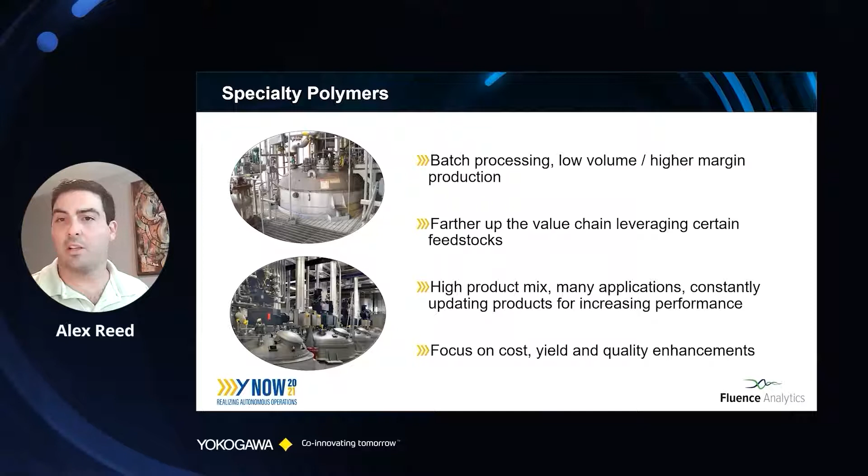On the specialty polymer side, we see batch processing, typically low volume, higher margin. This is farther up the value chain, leveraging a number of different feedstocks that come from that petrochemical world, and some are bio-based now too. What we see is a high product mix - a typical plant might have 30, 40, 50, 100, 200 SKUs targeted at specific applications, and they're constantly updating products, trying to find that edge and meet new customer requirements. So there's a very fast-paced, innovative process around launching new products in this industry. Just like commodity, they're also focused on cost, yield, and quality improvements.

To summarize, this is the trend everyone is following in the world - continuous optimization just to stay competitive, just to keep up. If you want to differentiate, you really have to drill into one or more of these areas. Some companies are particularly focused on cost improvement - they want to gain market share, increase margins, and be more competitive in pricing. Others are focused on launching the next great product, improving quality, tightening specifications to differentiate from competition. And everyone wants to get more out of their assets, improving yields without having to invest a whole lot in new assets.

Now we're seeing a very big push - this is an existential issue affecting all of us, with the ESG angle. The more you can do with less, the better. Even finding ways to enable that circular economy, going from end material back to feedstock and maybe back through to an end material using existing assets - there are some very interesting trends in that space. But the other areas are standard ones that everyone's always trying to push and drive to optimize.

Some of the things we're seeing in the process industry are just reflective of the environment - we have so much rapid change. Companies are focusing on operational and profit optimization - how do you build a specific case to improve the economics in each of your plants or whatever you're trying to do. On the supply chain side, this one's particularly acute now. We're seeing this all over the world - higher visibility, optimizing the paths through your supply chain, is absolutely critical.

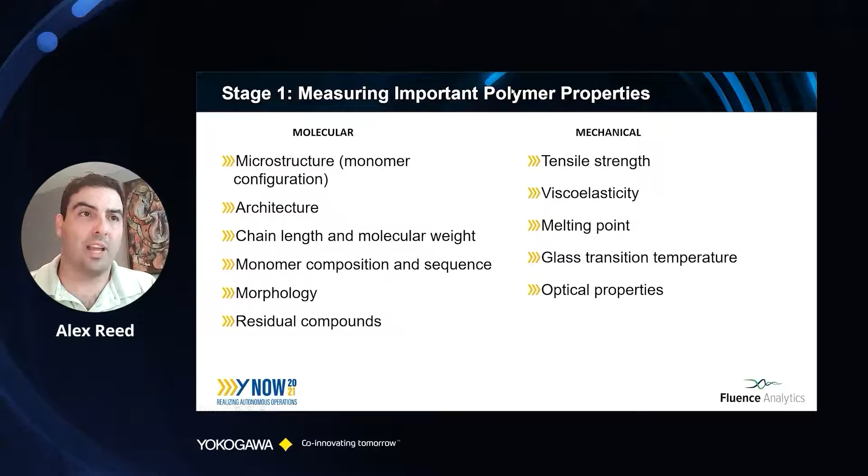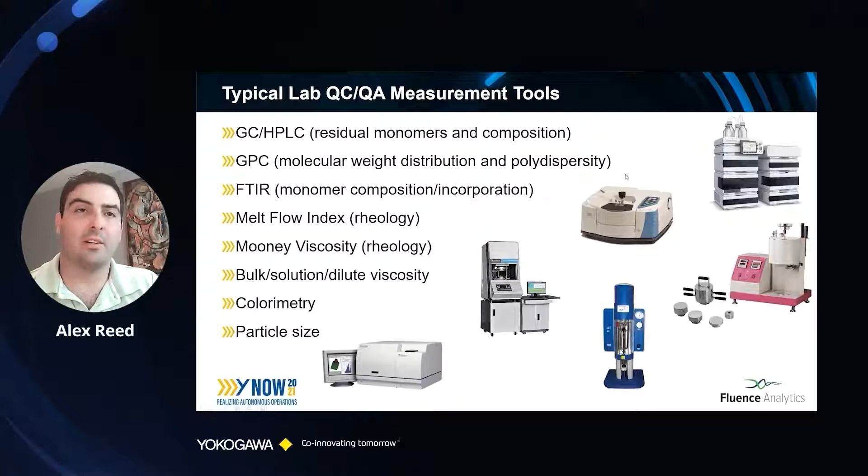And then you see on the way that's done now in the lab, there's a number of different methods. You've got GC, HPLC for that monomer approach, GPC for your molecular weight, FTIR. So there's a whole suite of tools currently being used in labs to tackle a number of those different measurements that I highlighted earlier, and fundamentally, a key issue here is there's a natural bottleneck in relying on an offline single point lab measurement.

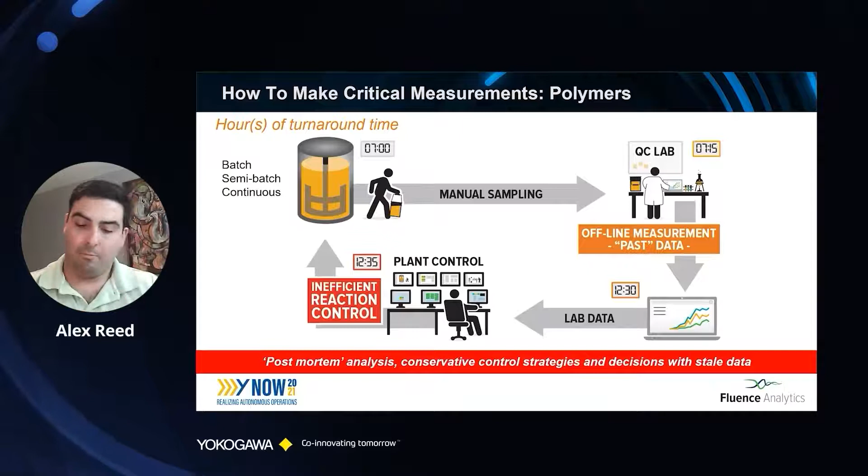And if you're trying to drive further and further autonomy, if you want to get tighter control, obviously sometimes you might have 1 to 2 to 3, 4 hours of lag time and you have one data point. It's going to be very hard to control a process simply based on that. And so that's one of the key issues that we've seen.

And so what our company has done is we've actually developed a technology. We're a spin out from Tulane University, and we were working on this for a number of years, working with chemical companies looking to optimize their production process. And we developed this patented ACOMP system, automatic continuous online monitoring of polymer reactions. And really what we're doing is it's a multi-detector, multi-parameter measurement to measure molecular properties in real time.

And so we have a fully integrated hardware system, everything from the sampling to the automation inside the box to the actual analysis software you see here that's interpreting all that data to provide that real-time output. And then what that really allows us to do is, with today a human in the loop, it goes into a control room, and having that real-time data and that human in the loop, we're able to start to take advantage of this measured deviation detection to intervene and start to optimize and control at that first stage.

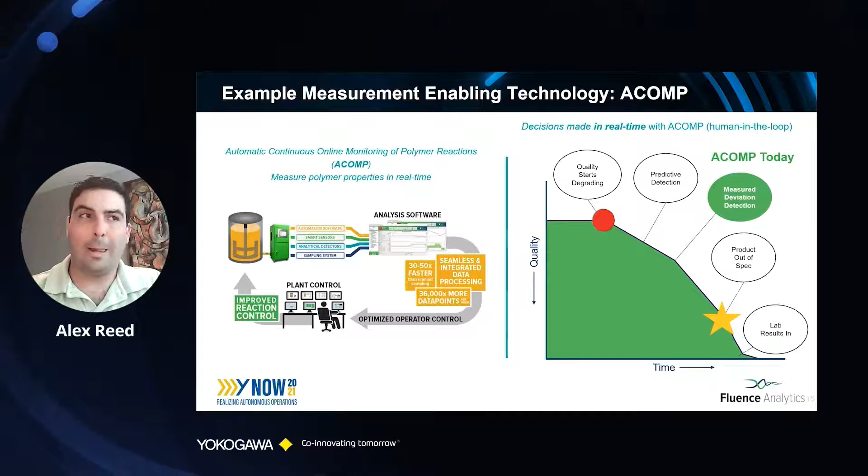And then, when you're on steady state, sometimes there are upsets. There could be feed rate issues, there could be a catalyst issue, all kinds of things can happen. And then it might be hours of disruption or deviation from the steady state before you even assess it, and then you can actually start to try to correct back.

So, the value of real-time information here is very clear, so you can understand, okay, I'm operator and control. I know when I'm trying to do these things based on the lab, but now I have that continuously. You can start to drive that optimization again with the human in the loop.

On the batch side, it's similar in that you're taking advantage of a dynamic measurement. So here, this is a very simple example, but say you're making a specific recipe and you do it the same way all the time, and you've basically optimized it probably for your lowest common denominator asset. So say you have a plant network and you have a number of different reactors, and the equipment performs differently, operators perform differently, feedstocks are all different, yet you want to make sure that no matter what, you end up with the same product. You tend to just try to stick with the most conservative approach to get there.

So going to a more dynamic approach allows you to take advantage of those differences and actually capture any opportunity, for example, cycle time. If your reaction's actually done dynamically rather than continuing to process, you could immediately stop and go to the next batch. And that time savings increases your total yield out of that asset.

And in this case, it was actually a case we did with a customer that we've simplified here. We observed that there was - this was unintended, but we saw it - a quality degradation as the polymerization continued. So as they knew they were done, we actually saw there was an endpoint. The over-processing actually caused the material to degrade because it's under temperature, there's stirring, things like that. So there's some other unintended consequences of that, but the key thing here would be cycle time optimization.

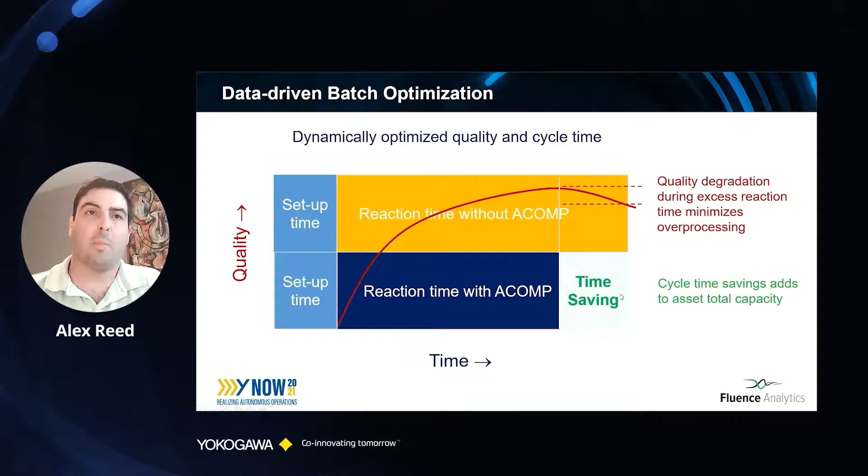All right, so the next, let's say you have the data you need. Now you want to ask, am I ready to do autonomous operation? What does that mean? It means you need to have all the sensors in place. You have to have the ability to actually control all the key parameters remotely, digitally. You need a fairly modern control system and the right data infrastructure. So there's an infrastructure piece you need to solve to get there.

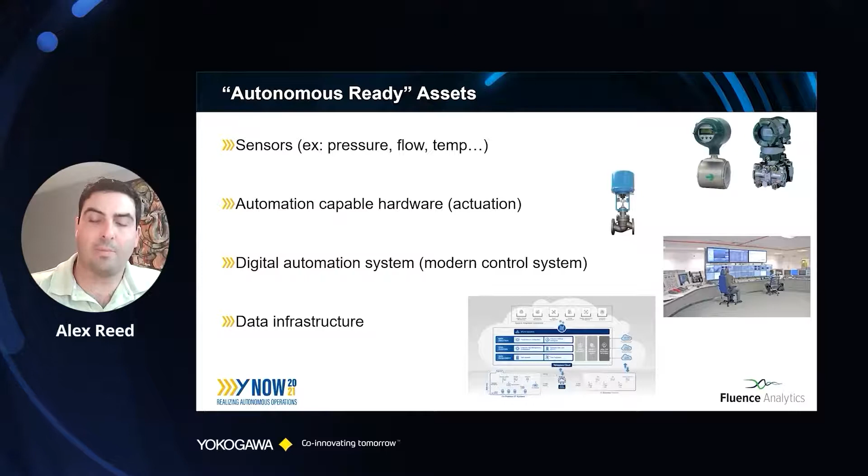And then once you have that, you're now ready to look at how you optimize production. So dig into the data analytics and the knowledge algorithms that you need. So what does that mean?

Well, it means now you have all this control system, historian data, because you have all these measurement parameters, including something like an ACOMP system. Now you have this full data set of properties and process data all in one database in your historian.

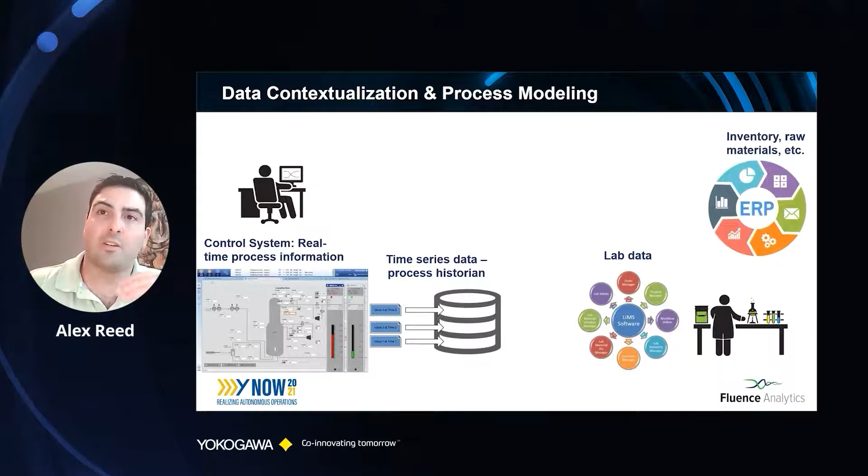You also continue to have lab data. That is your specification you release to customers. You might do it less now, but at least you have those checkpoints along the way, or you're testing inbound materials, whatever it is. And then you have your ERP information. You have your inventory, your raw materials, etc., coming from your supply chain.

So you pull all that together, and that's how you start to design your optimization strategies, your control strategies, you troubleshoot issues. So having these three things gets you to that first step of being able to get towards that autonomous control, to actually make those decisions for control.

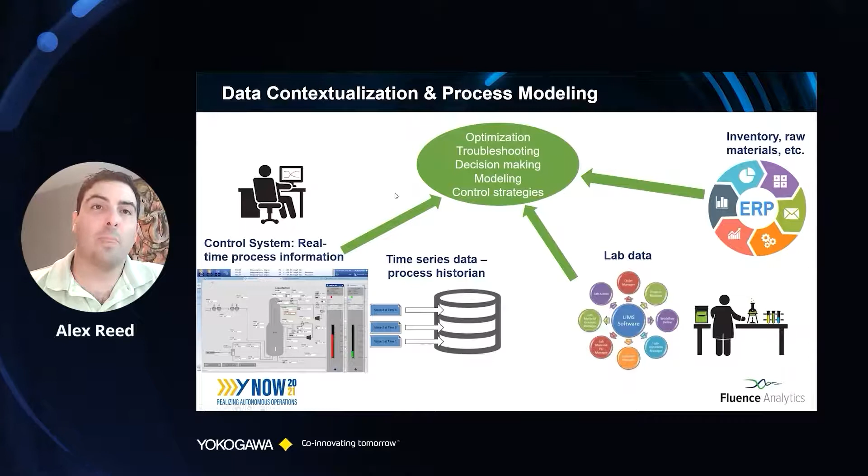All right, so then really taking that and actually converting it into insights. How do we get there? In our case, really what we're looking at is, now we know we're trying to drive to a specific property, a specific endpoint, whatever it is.

And what we've done is effectively, to close the loop, we're going from just measuring the deviation to actually predictively assessing it and taking corrective action. And so what that means is you've actually designed software that would automatically, based on your set points or your targets, take the corrective action as a deviation is assessed.

And that way you're able to fully optimize your production. And it's done without the human in the loop at that point, because you've trained the algorithms to take those actions in that earlier stage.

And so how do we get to that autonomous control world? One of the things I like to highlight is you always, to make this happen, have to have wins. You have to have case studies that deliver value, that have ROI, and then build up on those to do all that, because the investments you need to make are going to be significant. We all know the payoff is going to be there, but you have to be able to guide it along the way with the right justification.

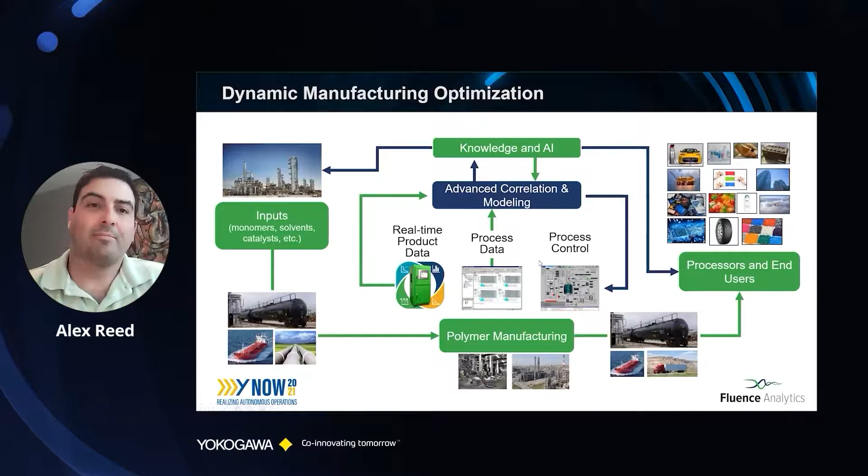So again, I view this as the North Star: going to full autonomous operations, tackling each of these challenges head on with the technology solutions as I've outlined. This is really where the industry needs to go, especially in this polymer space, but really worldwide across industries, and some are farther along than others.

Now, that doesn't mean everything's going to be a full autonomous operation, but I think more companies need to be focused on getting into one of these areas as quickly as possible to be able to adapt, because the challenges will only continue to increase. That's just the challenges we outlined today. I think there's going to be many, many more as we go.